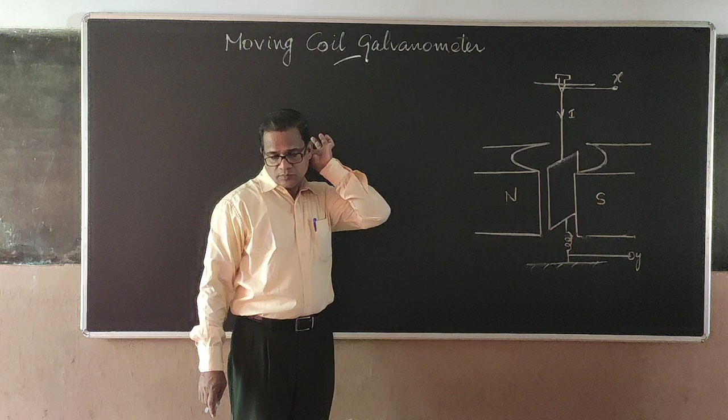Galvanometer, you might have heard, is an instrument used to detect the presence of current along with its direction of flow. We will be using that in the lab for measuring the direction of flow of current, like all these things.

But here we are discussing the theory behind the working of a moving coil galvanometer. Why is it called moving coil galvanometer? Because there is a coil, a rectangular coil inside this, and this coil will be twisting according to the direction of flow of current.

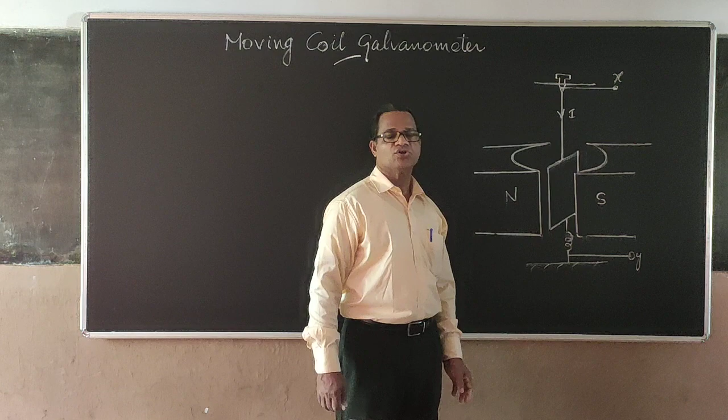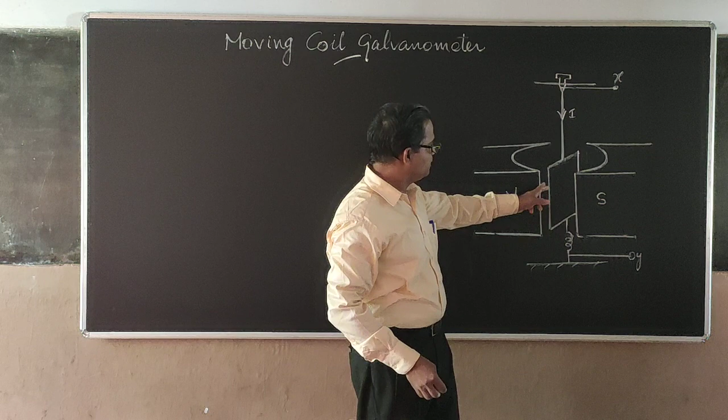So let us see the main parts of the moving coil galvanometer. There is a rectangular coil kept balanced on a balancing spring to the base, hanging from the screw here, and this portion is a thin fiber made of phosphor bronze. At the end of the phosphor bronze fiber there will be the rectangular coil cap. The other end of the coil is connected to the spring and going through.

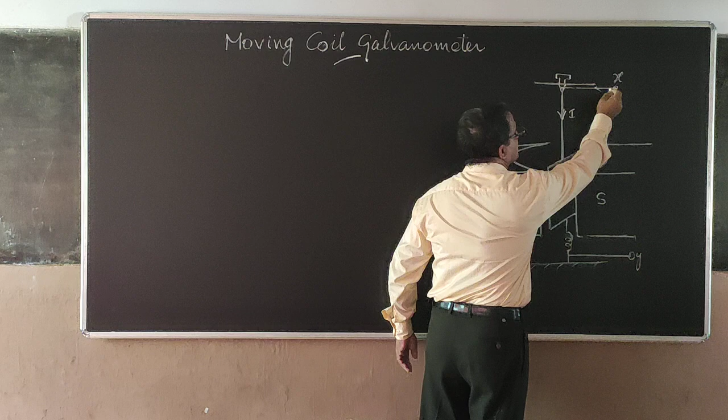So the current can come from X and flow through this rectangular coil and find its way this way. Now to provide a magnetic field there, we have got two magnetic pole pieces, North Pole and South Pole, as shown, having a curved face to get a uniform field throughout. Let us see how it is.

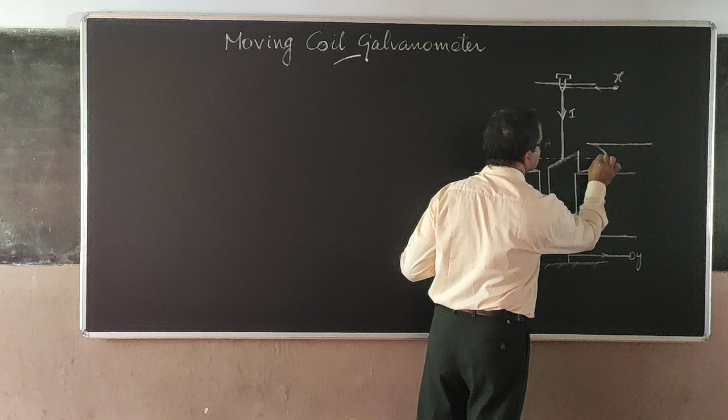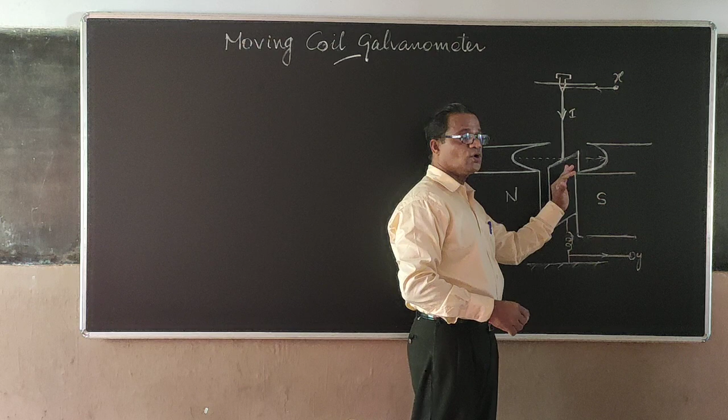Now, a magnetic field is acting from north to south direction, and a current is flowing through it, and thereby there will be a torque acting on it, and the coil starts rotating. Due to the rotation, we can find out how much current is flowing. Okay, that is the idea. So, anyway, main parts are the same.

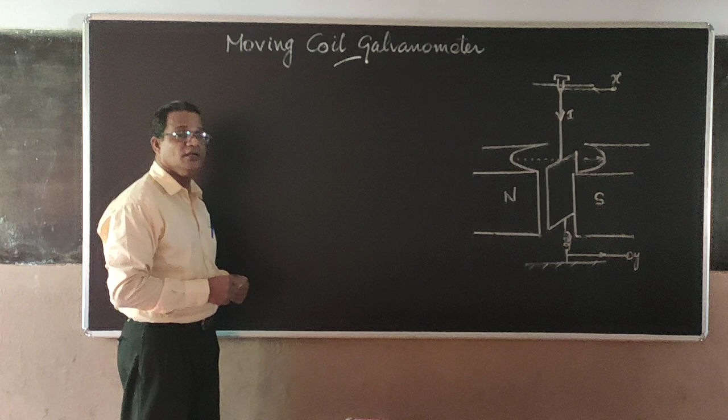Now let us see the principle of the moving coil galvanometer. The principle is that whenever a current carrying rectangular loop is kept in a uniform magnetic field, it is acted upon by a torque and found to be rotating. This is the principle of working of the moving coil galvanometer.

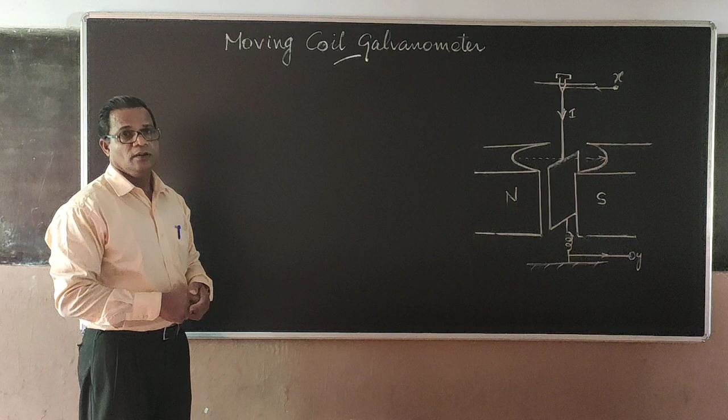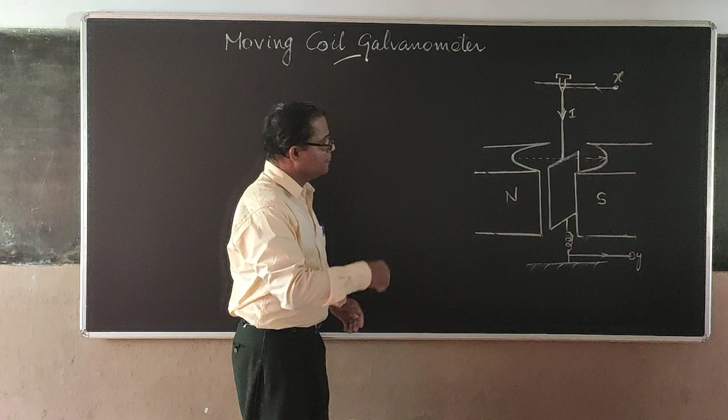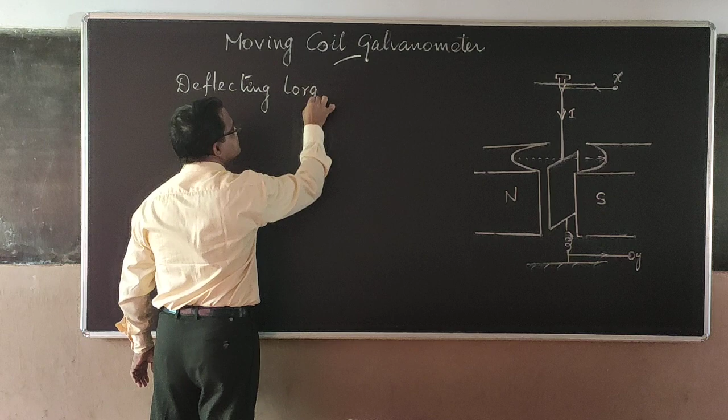Now that theory we have already seen, and I am taking the equation directly. Suppose there are n turns for the coil and the magnetic field existing, let it be B, and current I is flowing through it. Then that flowing current produces a deflecting torque on the rectangular loop, and the loop will be rotating, and it goes and stays at a particular point getting balanced.

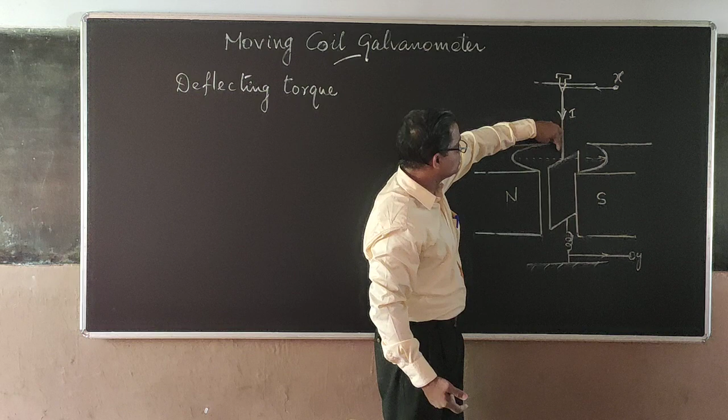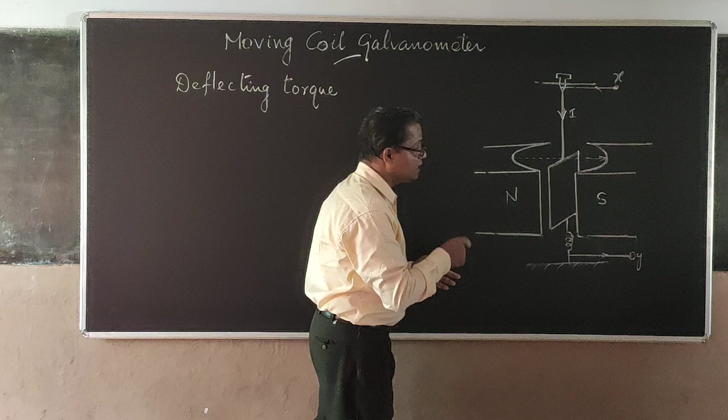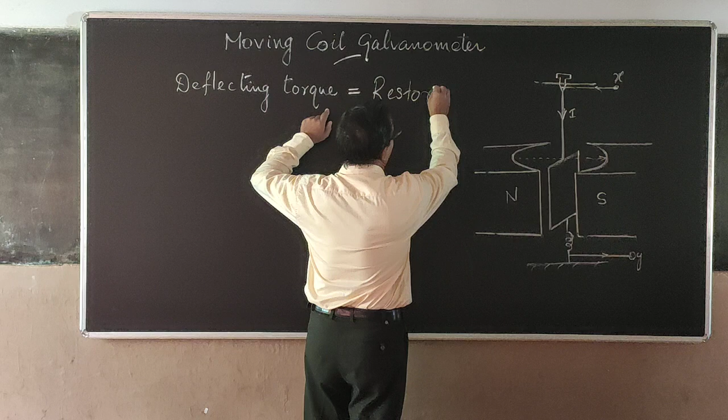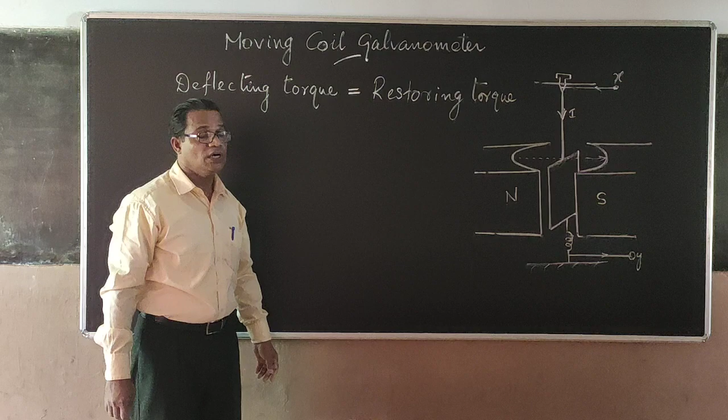Now why is it getting balanced? Because as it starts rotating, this phosphor bronze fiber and this vertical system will be having a restoring torque produced on it, and that restoring torque makes it balance at a particular point. And as it is balanced, you can see deflecting torque is equal to restoring torque. Remember, deflecting torque is produced by the current flowing through the loop, and restoring torque is developed on the suspension fiber.

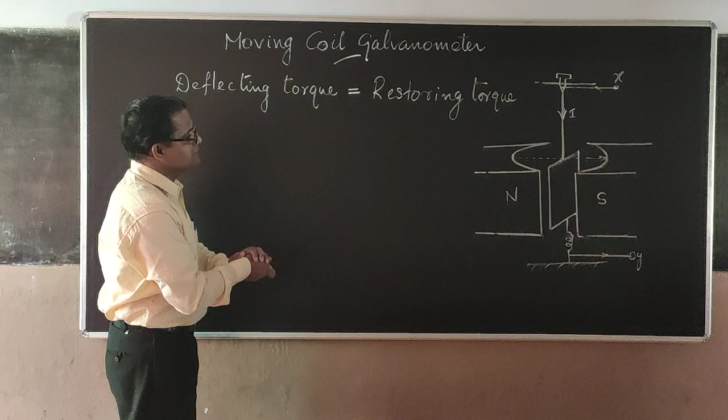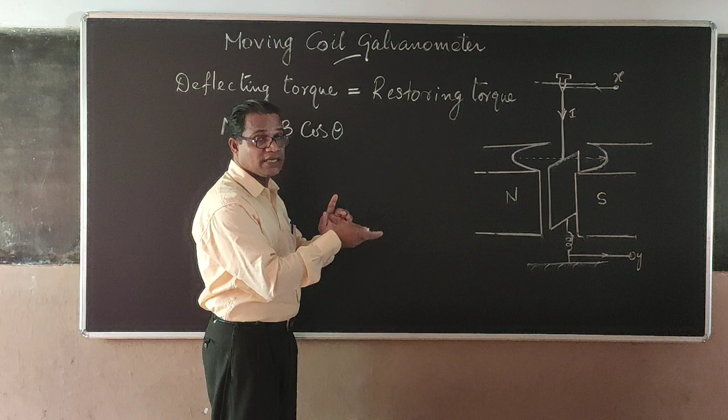Now this balances at an angle of theta, then deflecting torque can be taken as N I A B cos theta, where theta is the angle through which it is twisted and balanced. Then that will be equal to C theta, the restoring torque, where C is called the couple per unit twist.

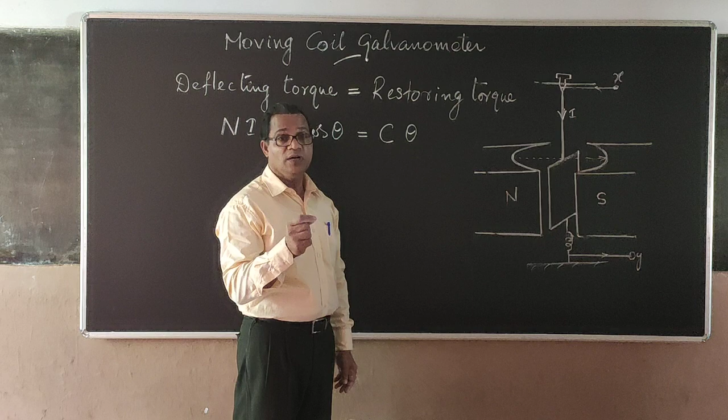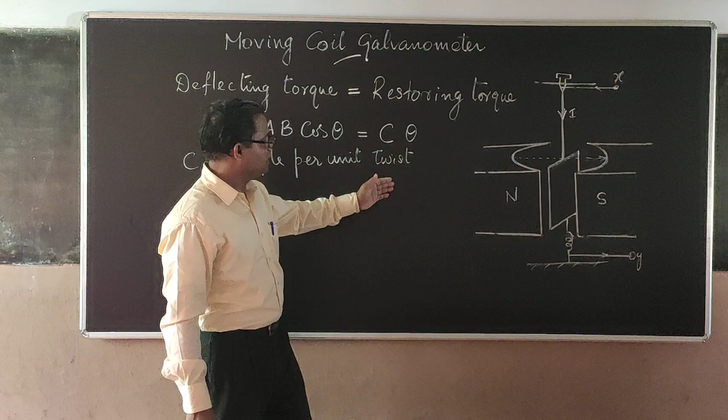C is called the couple per unit twist of the suspension fiber. It's a constant for that particular fiber, or you can get it from the data chart.

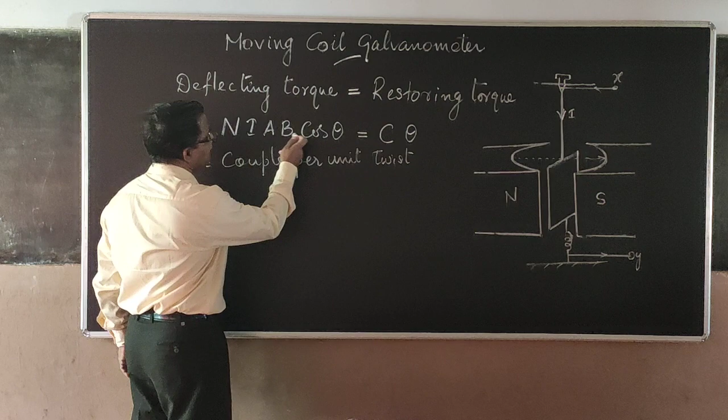Now from this balancing you can arrive at N I A B cos theta equal to C theta, where the current I equals C by N A B into theta by cos theta.

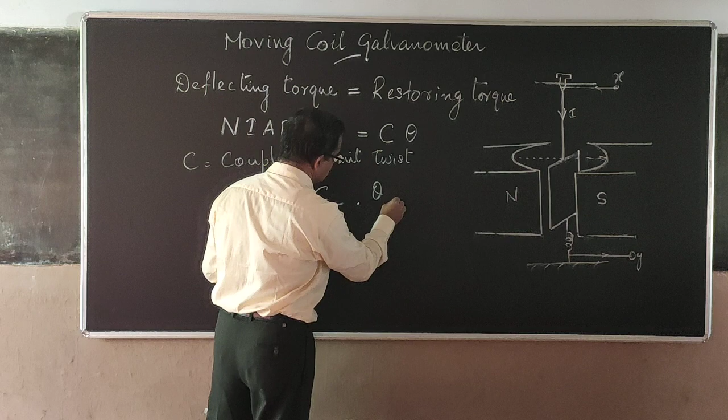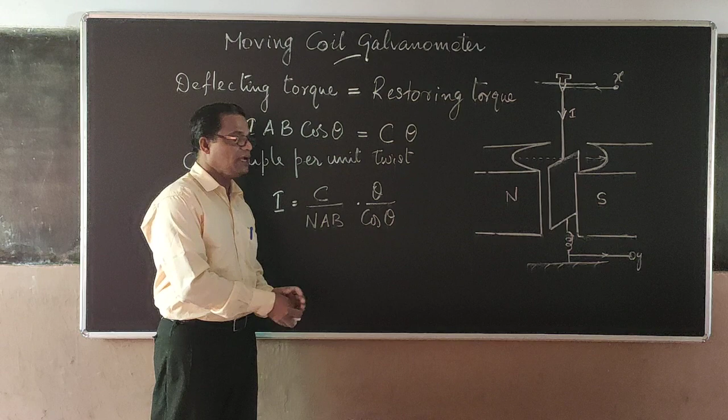Now this is the equation for current we are getting, and we cannot say it's a linear function because this theta by cos theta term is coming and making a problem. So this nonlinearity can be removed so that you can get current I directly proportional to angle of twist. Now how can it be done?

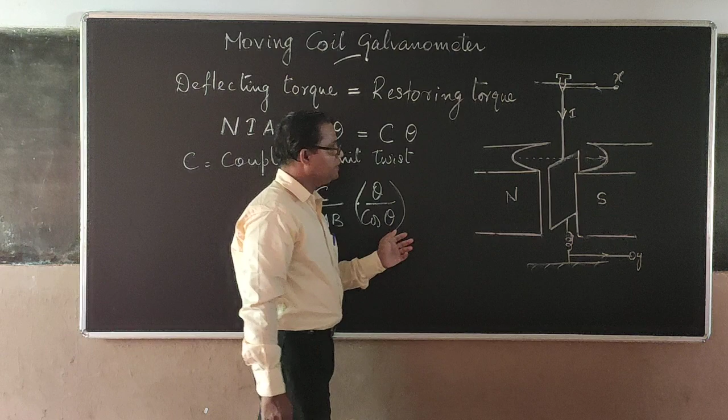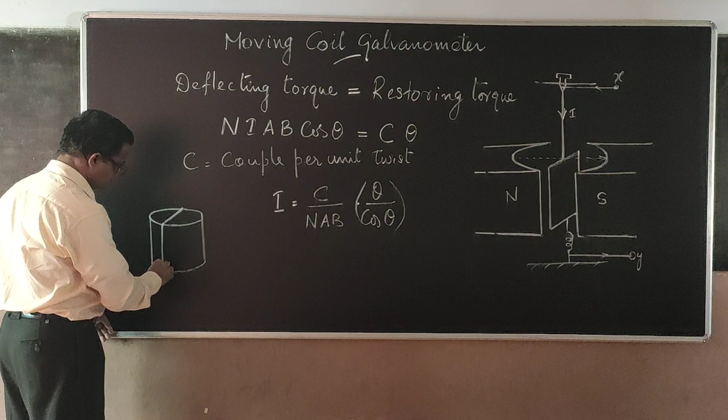That is the main part of making what we call a moving coil galvanometer. To overcome this problem, we will be taking the windings on a solid soft iron cylinder - a cylinder made of soft iron, on which you make the windings. So if I take the windings on a solid soft iron cylinder, it comes like this. The cylinder will be like this, with a cylindrical portion on which the windings come.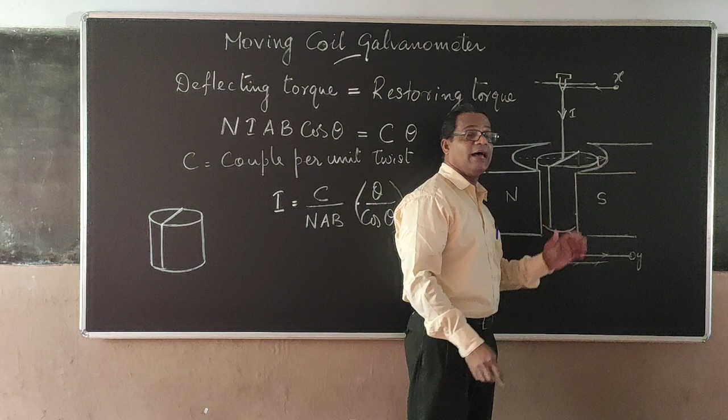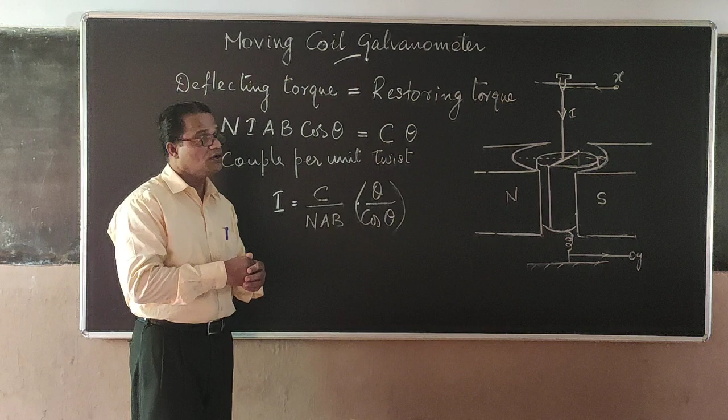Now what will happen is, earlier the magnetic field lines were moving straight from north to south. Now, introducing that soft iron cylinder, the magnetic field lines are forced to bend as they enter into the solid soft iron cylinder. We can see this separately - see the magnetic field when it enters into the solid soft iron cylinder, suppose I view it from top.

This is the north pole and this is the south pole, I am looking from the top. Then the field line comes from here and goes in, like this. So the magnetic fields are now going into the soft iron cylinder and coming out because of the property of the ferromagnetic material.

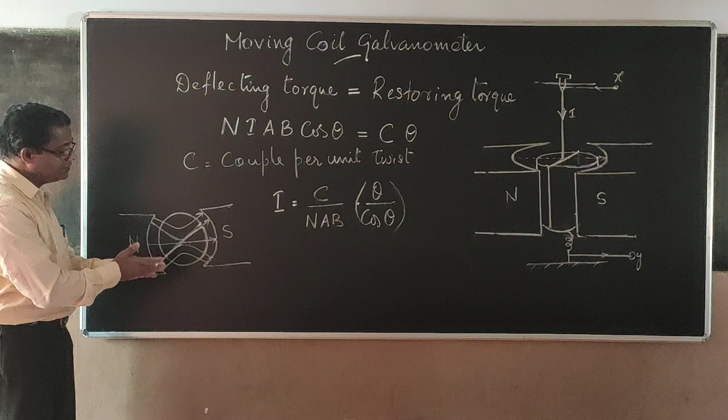Now what happens as far as the windings are concerned, you see the winding will be coming like this. If it deflects due to the current flowing, you can see the winding also moves along this way. Whatever the orientation be, whatever the twist be, you can see the plane of the coil comes parallel to the magnetic field. See this? So part of this goes like this, and here the part comes like this, and for the rectangular loop it is going like this.

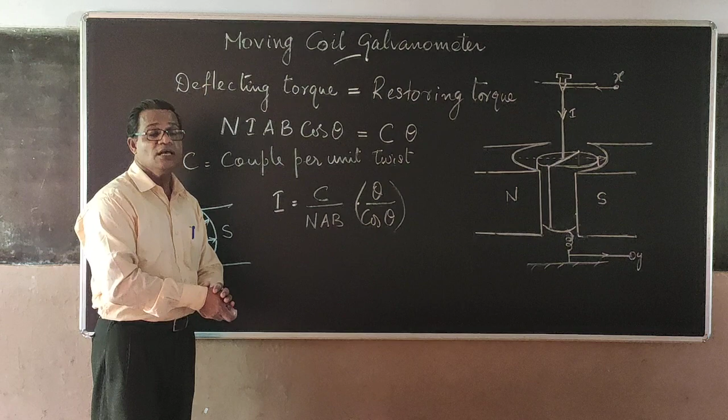So the field direction and the plane of the coil will always be parallel to each other, and therefore, since that is parallel, theta will be 0 and NIAB cos theta becomes the maximum. Then current I will be equal to C by NAB into theta.

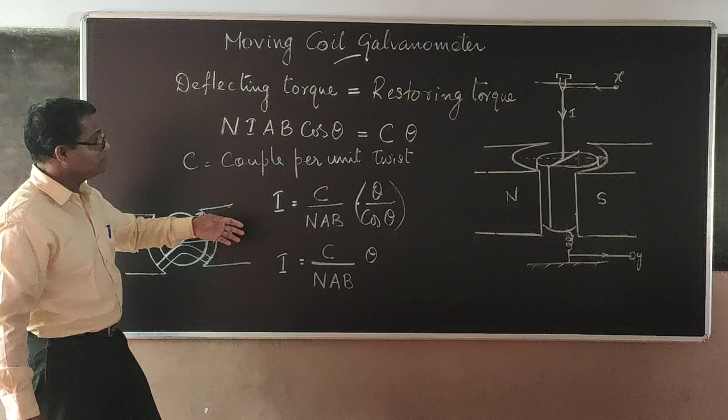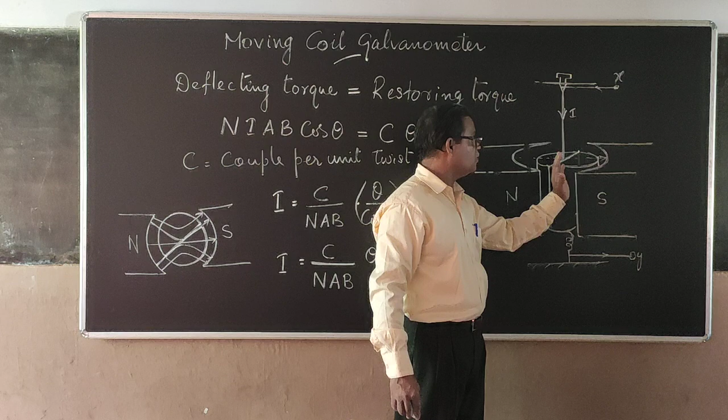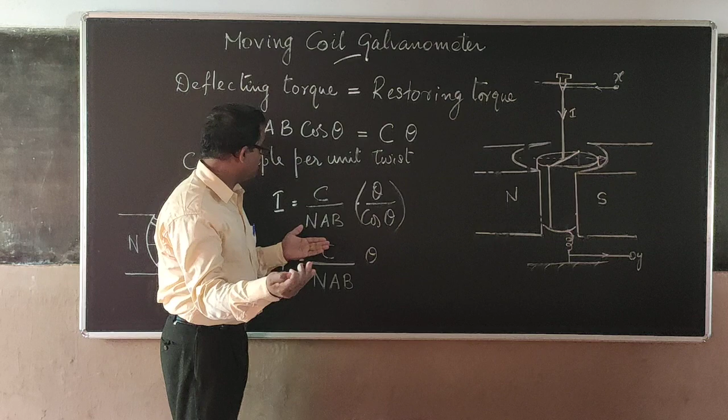Now whatever the twist be, the deflecting torque becomes maximum for any orientation, but this theta will be there because this theta is actually the twist produced on the suspension fiber. That twist will always be there. As current flows, the armature coil will be rotating, and due to that rotation and deflection, there will be a twist on this fiber always. But whatever the twist be, the plane of the coil and the field will come parallel to each other. Therefore this part will always be maximum. That is what you have to understand.

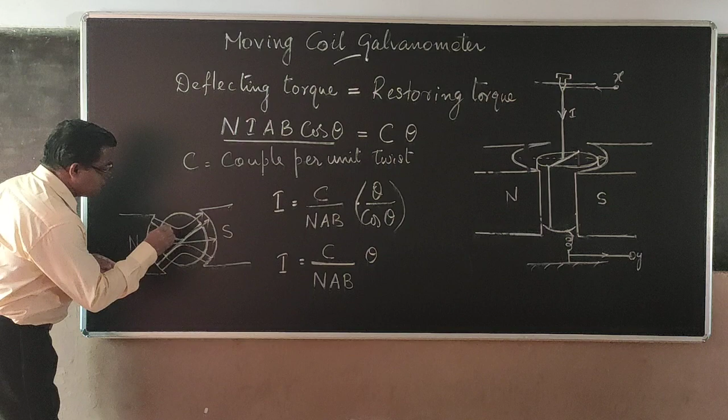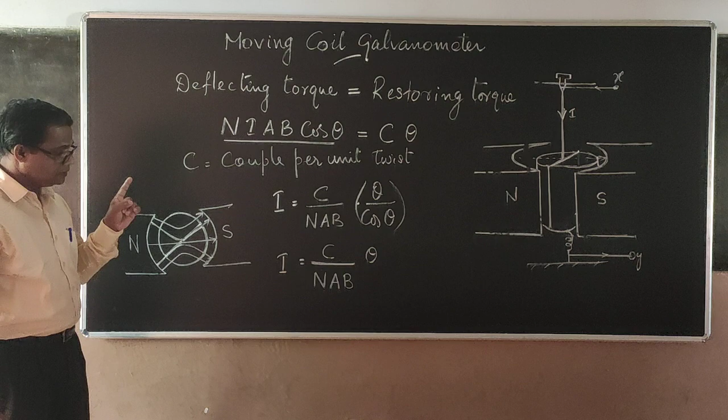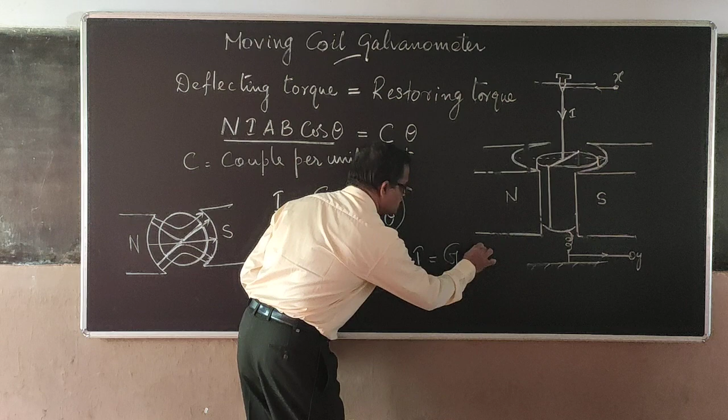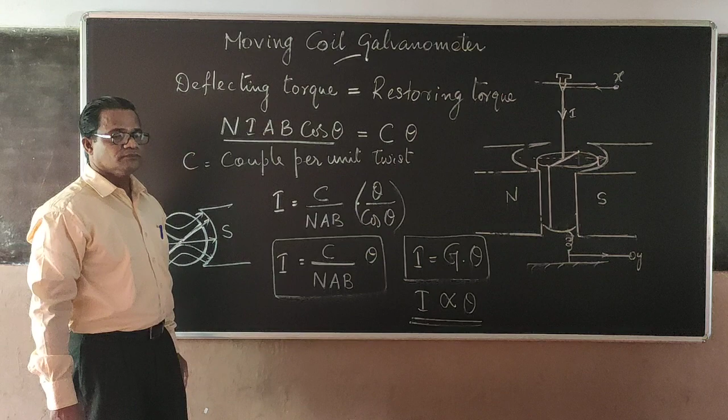Now, to make the field radial like this, we are introducing the solid soft iron cylinder. Now you got the equation here, and therefore I can say I equal to G into theta, or current I directly proportional to the angle of twist. So depending on the angle, you can identify whether the current is a strong current or a weak current.

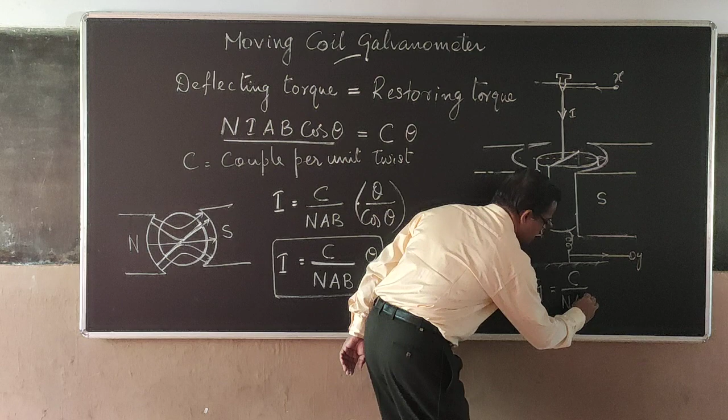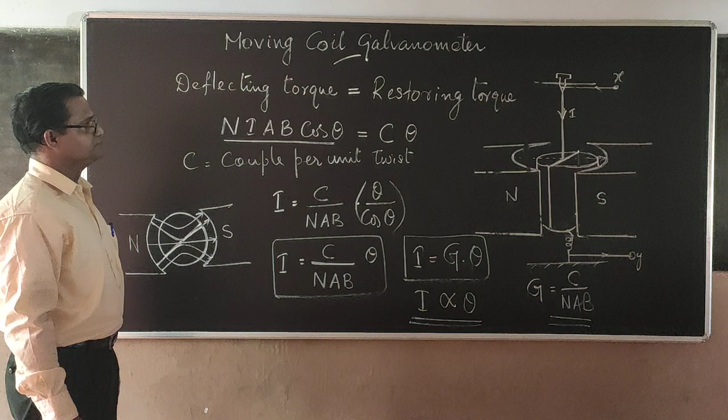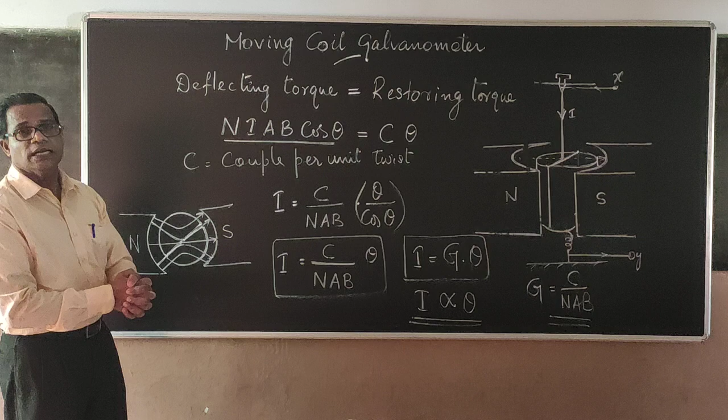And then I introduced a constant called G, capital G, equal to C by NAB, called the galvanometer constant. So these are the main points to be noted in the case of the moving coil galvanometer - this is the theory part only, the practical side we have to see.